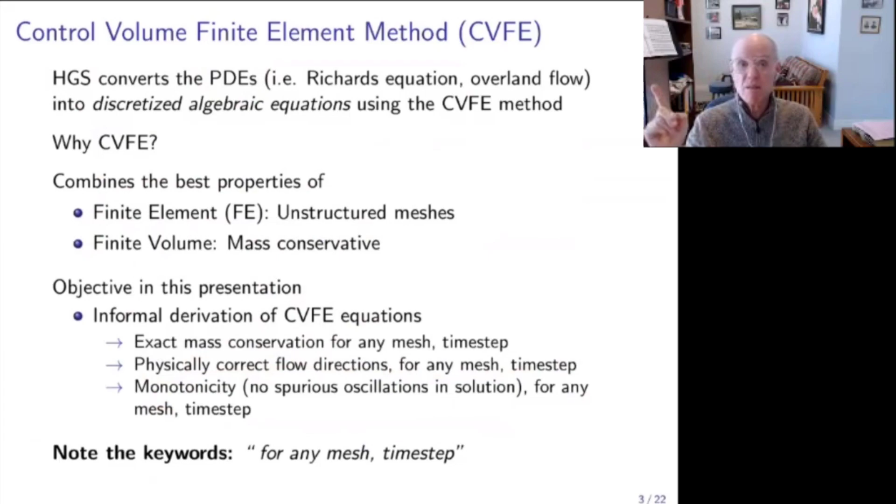And again, I'll point out I've used this same keyword several times here, for any mesh in any time step, not just in some theoretical limit of vanishingly small mesh size and time step. So first of all, we'll think of looking at our equations in terms of a discrete mesh. So we define a mesh, and we'll look at a generic node I, and it will have a bunch of neighbors. And I'll be using node J as a sort of generic neighbor of node I, a mesh neighbor.

We will make no assumptions about the mesh, the type of mesh used. It could be linear basis functions on triangles, or prisms in 3D, or tetrahedra. And we don't really have any assumptions about dimensionality, 1, 2, or 3D, or the order of the basis functions we use. And the same idea is used for subsurface equations, surface equations, fractures, double porosity, and so on. This is a very generic technique that can be used with wide applicability.

So as a prototype, to give you an example of how we discretize the equations, let's look at Richards' equations, where I'm sure you're all familiar with Richards' equations. So the left-hand side here, I have what I call the accumulation term, which is really just the time derivative of the mass accumulation at a particular point in space. And define some of these terms in the equation here. Theta here is, of course, the porosity. And S sub W is the water saturation.

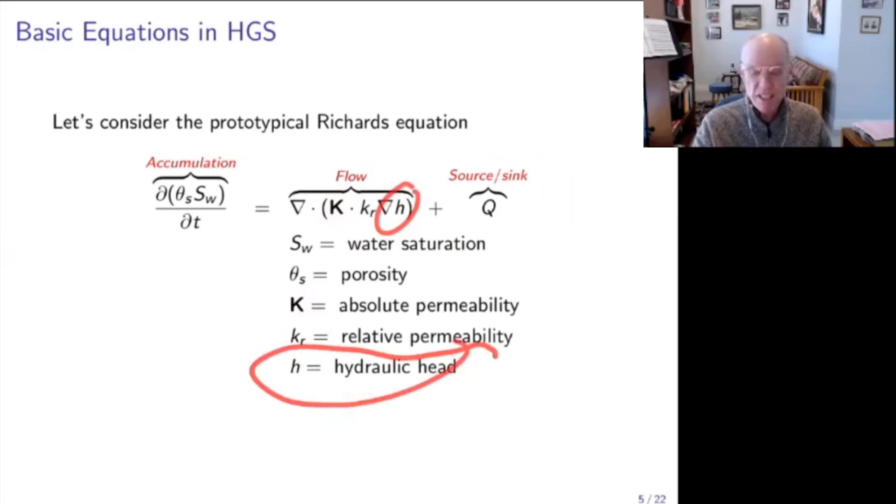And the right-hand side here, I have what I call the flow term. And the flow term has the absolute permeability in there. It has the relative permeability, K sub R. And it has the hydraulic head. And of course, on the right-hand side, what you get is the gradient of the hydraulic head. And finally, we have some source sink terms. Okay, so accumulation, flow, and source sink.

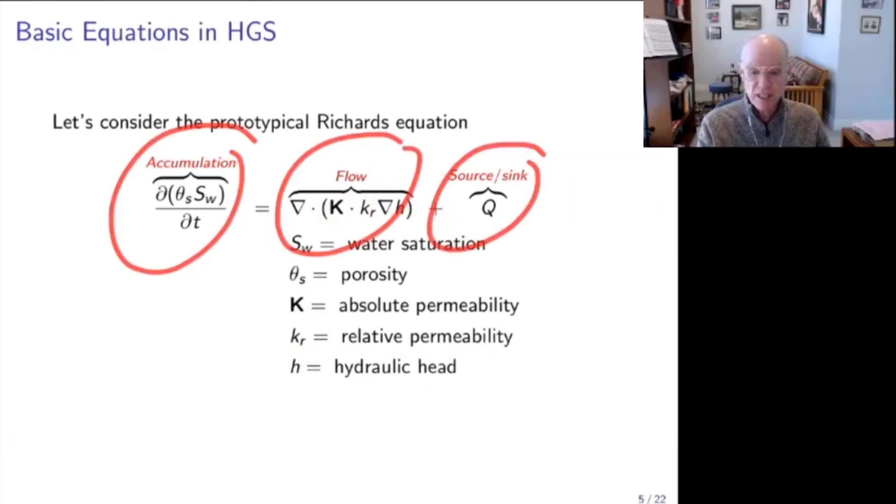Now, I'll remind you of the properties of finite element basis functions. These are just interpolants, if you like. So given a mesh, which is a bunch of discrete nodal values, at each node, we define what we call finite element basis functions. And these basis functions or interpolants have the following properties. So N sub I, the basis function associated with node I, is 1 at node I and 0 at all other nodes. And the sum over all the nodes of the basis functions equals 1 everywhere.

And on the right-hand side of the slide here, I've got the examples of one-dimensional basis functions, linear basis functions, also called hat functions. And you can see in that case that basically, xi is node I, say, so Ni is the basis function associated with that node. It has a property that it's equal to 1 at node I and 0 at all other nodes.

And so, for example, if hj is the approximate value of the head at node j, then if I look at this expression here, I can approximate h, the hydraulic head, everywhere by just multiplying the nodal value times the basis function and summing that, and that will be our approximate value of the hydraulic head, which is true everywhere in the domain. It's just a linear interpolant over these basis functions.

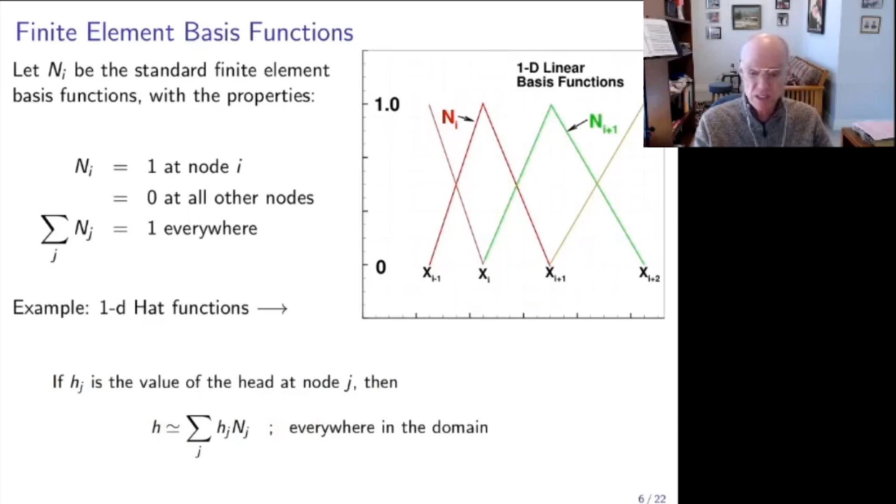Now, how do we approximate the solution using these basis function interpolants? Well, let's let hjn be the approximate value of the head at node j, time step tn, or n delta t. And again, we're going to approximate the hydraulic head, porosity times saturation, which is essentially the mass, and the source sink term at time step n, which is n delta t, by the following. So h, we'll approximate it by the sum over all the basis functions of the nodal value at time n, node j, times the appropriate basis function.

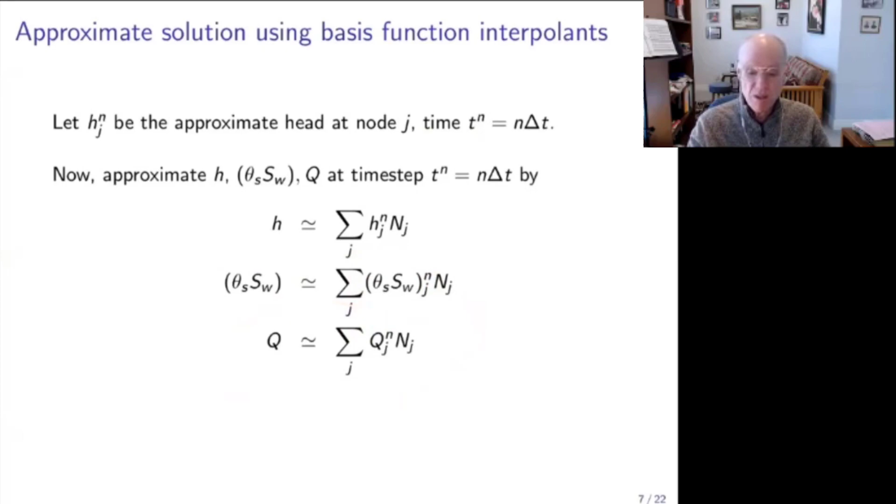And similarly with porosity times saturation, so the porosity times the saturation at node j times the basis function, sum over all the nodes. That will then give us the approximate value of this expression everywhere in the domain. And similarly, the source sink term, same idea, multiply the nodal value of the source sink term times the basis function and sum over all the nodes.

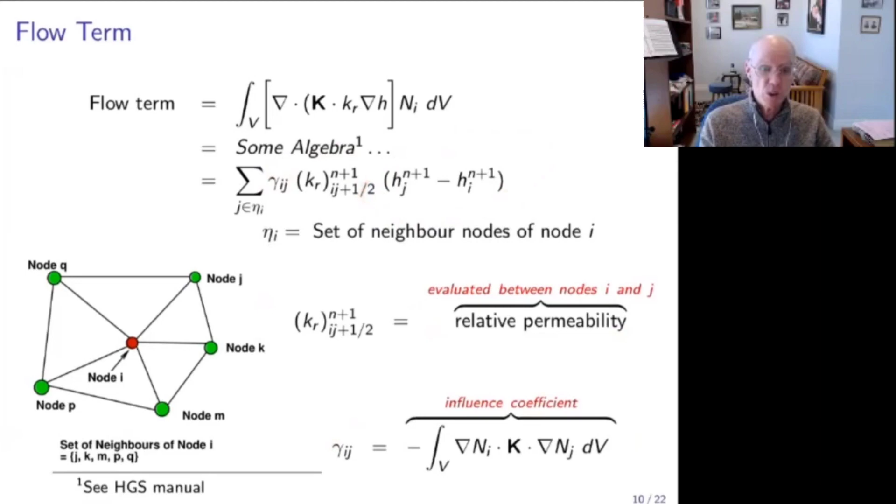And finally, this gamma IJ term here is what's called the influence coefficient. And that's given by this expression here, which is somewhat abstract looking, but it's easy to interpret physically. And finally, of course, I have the head difference between node J and node I. So the final equation at node I ends up being very simple. So recall again that the mass at time n+1 is just given by porosity times saturation times the volume associated with that node. So the final discretized CVFE equations at node I are simply a mass balance.

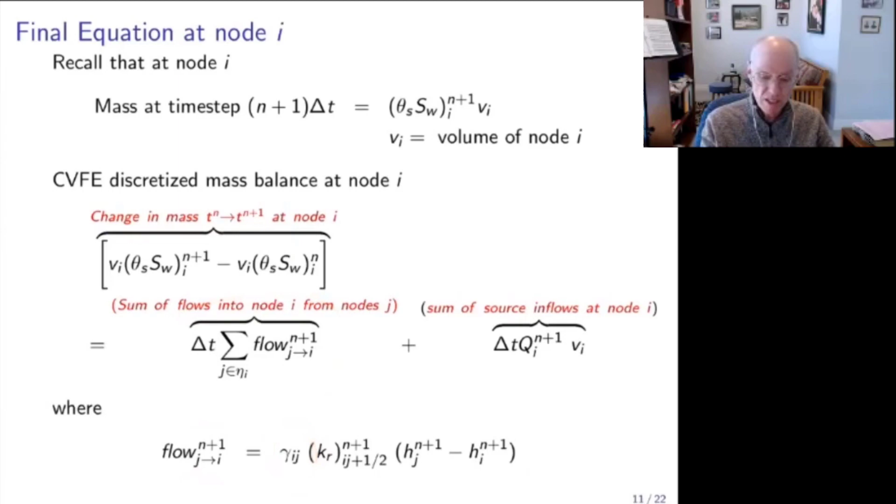So the left-hand side is just the mass at time n+1 minus the mass at time n. Right-hand side, I have the sum of flows into node I from node J, and the sum of the source and sink inflows at node I, whatever they may be. Where this flow term here is just given by the expression from the last slide. So flow from J to I is gamma IJ, the influence coefficient, times the relative permeability term times the head difference.

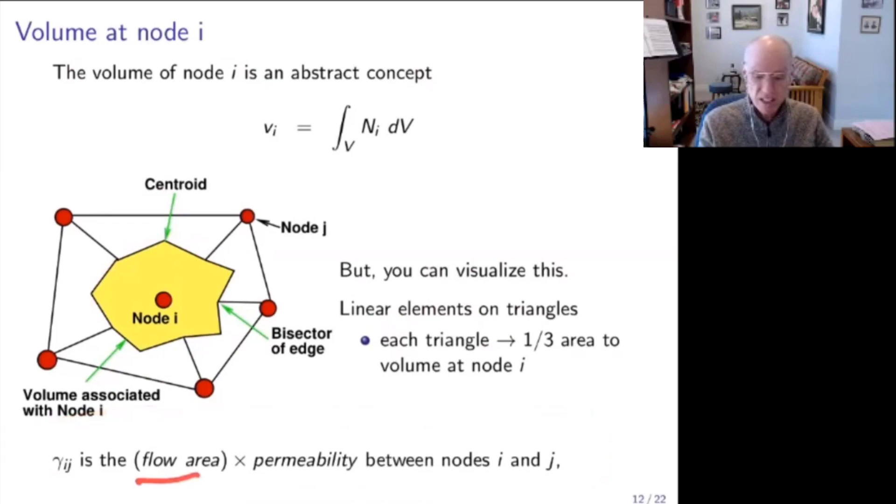Now the volume at node I, that's kind of an abstract concept. The volume is just simply the integral of the basis function over the whole domain, but you can visualize this. So for linear elements on triangles, each triangle contributes 1/3 of its area to the volume at node I. So here's effectively a visualization of the volume associated with node I. Each triangle which neighbors that node contributes 1/3 of its area to that node. And if you want to have a picture in your mind of what that influence coefficient is, it's essentially the flow area times the absolute permeability between node I and node J.

Now, what about mass conservation? I claim that the CVFE method is mass conservative. And this is what we mean by that. I'll just state that like a theorem. If the discrete equations are solved exactly, then the CVFE method, or discretization, has exact mass balance for any time step and any mesh size.

Well, the proof is actually trivial. It's got 2 lines. I'm going to sum the CVFE equations over all nodes. So I'll take every discrete equation and I will sum it over all the nodes. So the left-hand side is going to be the total mass at time n plus 1. The right-hand side, I'm going to have a term which is the total mass at time n. This will be the total source inflows over that time step on the right-hand side.

And finally, here's the flow term here. Now, I cleverly wrote this flow term using the fact that if I just sum for j bigger than i, then if I include the flow term from j to i and i to j, that will be the total flow over all the flow terms on the right-hand side. And I did that because then it's obvious. Flow from j to i is going to be equal to the negative of the flow from i to j. So this whole term here will just be 0.

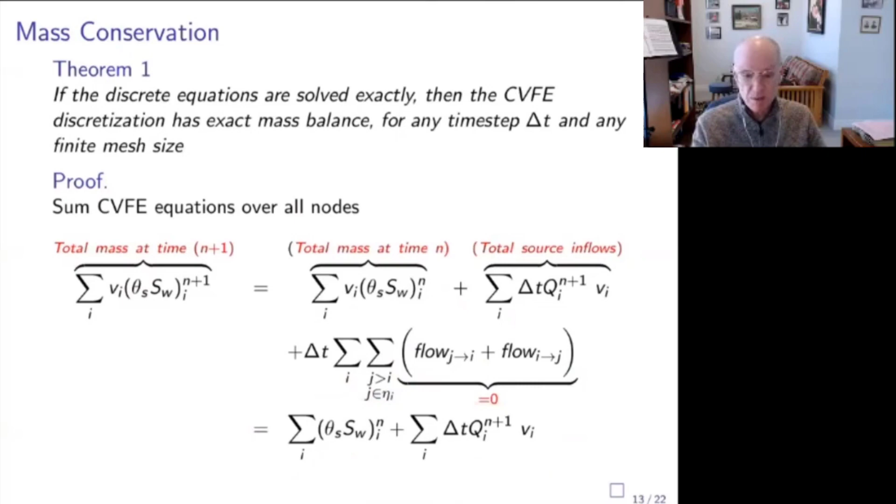So the right-hand side then is just this expression here, which is total mass at time n plus source inflows over that time step. Now, in other words, the total mass at time n plus 1 equals the total mass at time n plus the sum of source and sink terms.

Now, note that any convergent discretization conserves mass as the mesh and time step go to 0. A mass conservative discretization conserves mass for any mesh size and any time step size, not just in the theoretical limit as the mesh and time step go to 0. In practice, we're always using finite mesh sizes. So we're interested in what happens in the finite mesh size, not just in this theoretical limit.

If this is not true, you get rather absurd things happening. Dense fluids float on top of less dense fluids in a discrete sense, which is obviously not physically observed. So I'll emphasize again, this positive coefficient gives us physically correct flow directions. So for example, if the head at some node is Hi, then if the head at node j, Hj, is bigger than Hi, the fluid will flow from j to i in the obviously correct physical flow direction. And similarly, if Hi is bigger than Hk, fluid will flow from i to k.

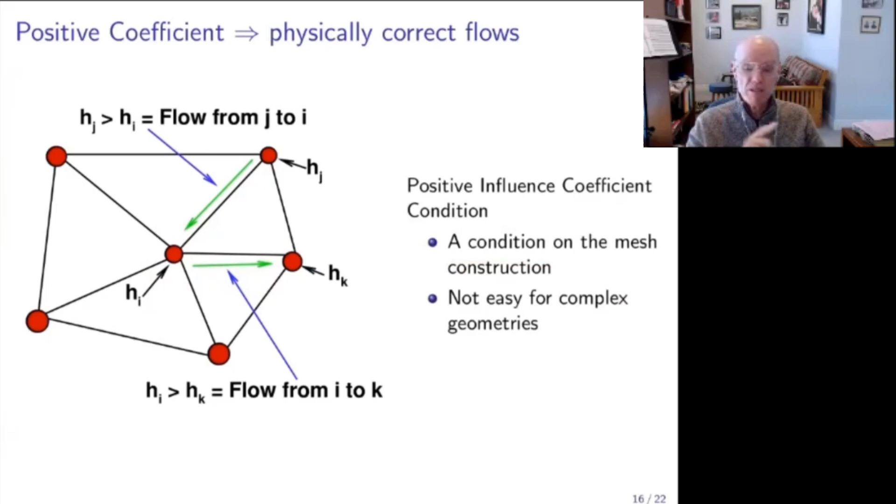So if a CVFE method is used with fully implicit time stepping, positive influence coefficients, and upstream weighting, then the scheme is monotone. And what does monotonicity mean from the point of view of mathematics? It simply means that if I take the partial derivative of H_i^(n+1) with respect to H_j, this is greater than or equal to 0. So what does that mean? Or why is it important?

Well, you can kind of get an intuitive idea why that's a useful property, because if that's true, and if I look at my generic node here, node i, if I perturb the value of the head at the neighbor node j, then this will result in a positive change in the head at node i. This physically makes sense, right? Increase this value here, then this value should increase. And the bottom line from this property is that this guarantees that non-physical oscillations cannot occur in the numerical solution. And of course, you also have the property that mass cannot go negative, which is obviously something you require.

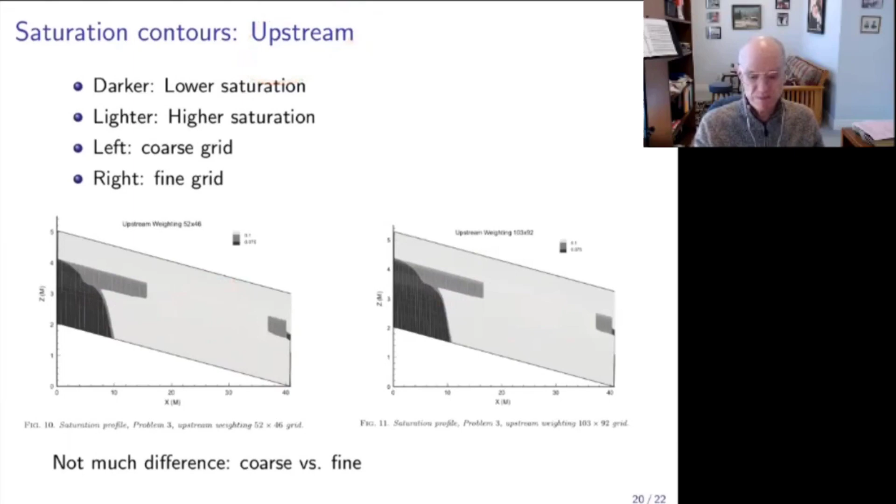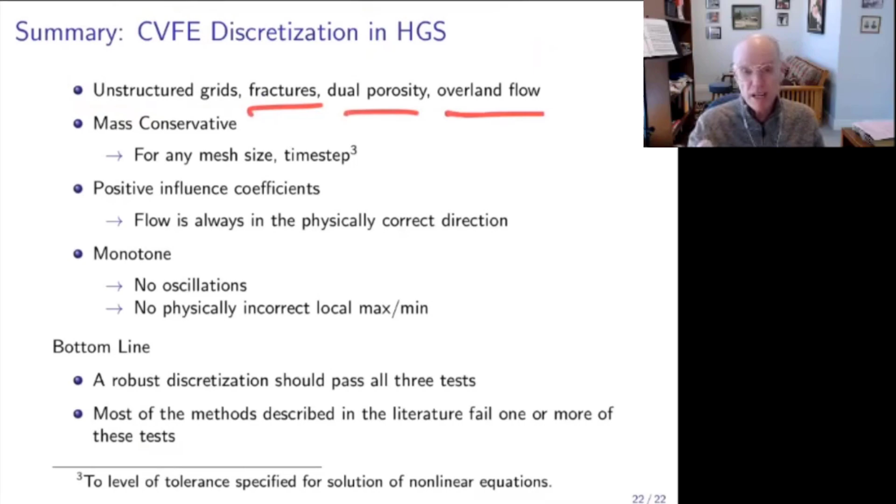Okay, so let's summarize then our final results here about this CVFE, control volume finite element method, which we use in HydroGeoSphere. So basically, we use unstructured grids, and in that way, it's much easier for us to handle things like fractures, dual porosity, overland flow features with streams and lakes. Our discretization is mass conservative.

So for any mesh size and any time step, again, this is any mesh size, any time step, not in some theoretical vanishing limit of mesh size and time step, the discretization is mass conservative. We ensure positive influence coefficients when we construct a mesh. This means that the flow is always in the physically correct direction.

And it's monotone. Use of upstream weighting gives us a monotone discretization. What that means is that there's no physically incorrect oscillations. There's no physically incorrect local max and min. So the bottom line here is that a robust discretization should pass all these three tests: mass conservative, positive influence coefficients, and monotone, to give you a robust technique, right? We want a robust technique.

Unfortunately, you'll see a lot of methods in the literature fail one or more of these tests. So if somebody comes to you with a new discretization method, you would ask, okay, is it mass conservative? Does it have positive influence coefficients? Is it monotone? If it is, okay, that's a candidate method to be used. If not, we think this CVFE method is a good technique to use because it's very robust, very reliable, and gives you good results no matter how nasty a problem you've got.

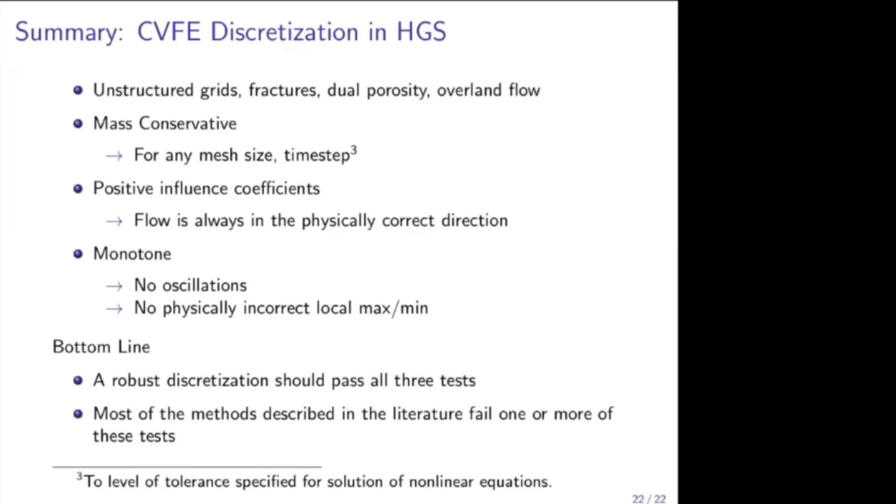My talk today is about more practical aspects of the CVFE method and parallel processing. As Peter mentioned in the previous talk, the CVFE method is robust and reliable. If someone asks me if every simulation result will be good with the CVFE method, my answer will be absolutely no, because the CVFE method is a good tool like a nice car, but it depends highly on who is driving the car. So my talk mainly focuses on why mesh generation or construction is important, and how to use or drive the CVFE method to achieve better solutions.

Additionally, I'm going to talk a little bit about the parallelization techniques implemented in HydroGeoSphere. Now, a brief overview of my talk is that first I will talk about mesh construction for CVFE and then parallelization. Specifically for the first part, main numerical schemes implemented in HydroGeoSphere, and then a little bit about mesh construction for best practice by checking your mesh quality. And then for the second part, I will also introduce some parallel schemes applied to HydroGeoSphere, which we specifically developed for improving computing efficiency.

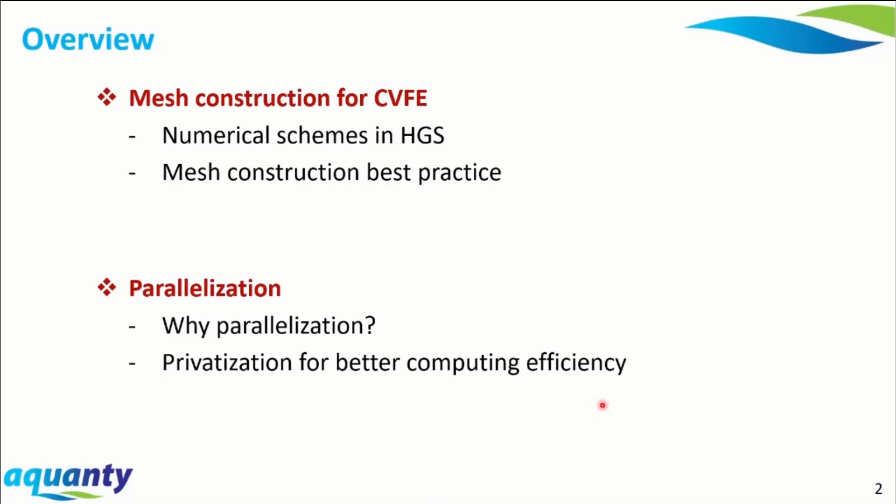Here is an example of meshes for 2D surface and 3D subsurface flow and solute transport simulations. This numerical model consists of 15 layers with 220,000 nodes per layer, and that comes to 3.5 million nodes in total. This model is constructed with triangular elements for the 2D surface model and prism or pentahedron elements for the 3D subsurface model.

You can build a 3D model with one of these three types: tetrahedrons consisting of 4 nodes, hexahedrons with 8 nodes, and pentahedrons with 6 nodes. But a numerical model with mixed mesh shapes is not currently applicable to HGS.

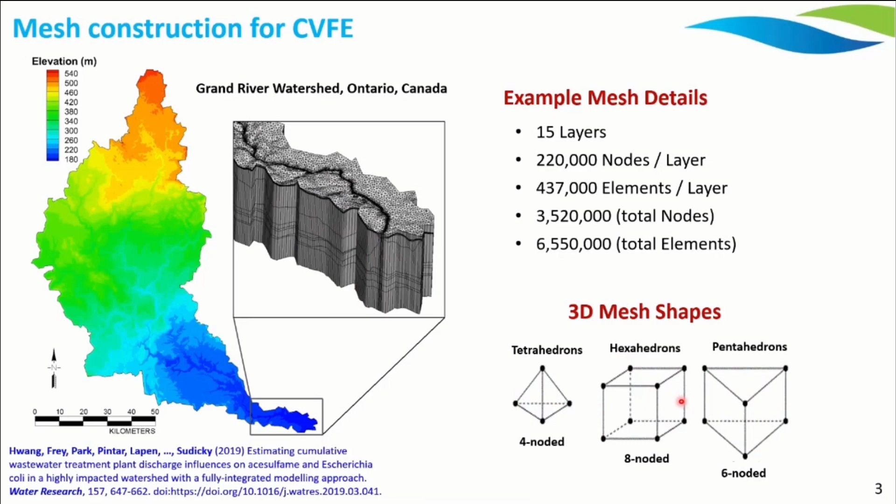Okay, let's look at numerical schemes implemented in HydroGeoSphere. Here, this figure shows the difference between physical and numerical domains. Physical domain represents the real system, and the numerical domain represents the simulation domain.

In the finite element approach, as Peter mentioned before, the finite element method uses basis function interpolants to approximate solution in numerical domain. Problem is the basis functions are based on the orthogonal coordinate system, which is the same as the physical system. For numerical domains, if a mesh is a hexahedron with right angles, it is easy to calculate basis function interpolants because every angle in this element is orthogonal.

However, in many cases, we use unstructured meshes like this to represent more realistic conditions. In this case, this numerical domain is required to be transformed using this Jacobian, which is extremely time-consuming for calculation. So we use the integrated finite difference approach, which is relatively simple and cost-effective.

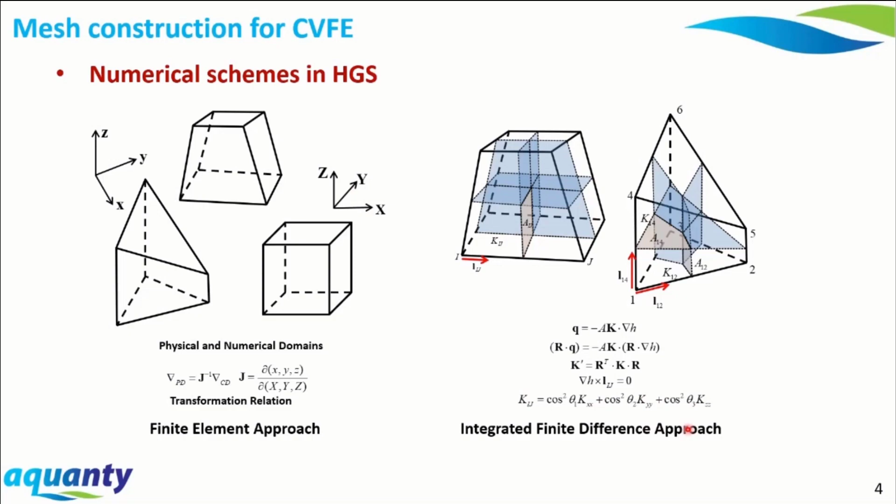Let's look at the importance of mesh construction. For calculating the influence coefficient along each segment in this triangular element, originally we used the circumcenter approach to calculate the influence coefficient for each neighboring node. In many cases, it works fine if the circumcenter is located inside of this triangular element.

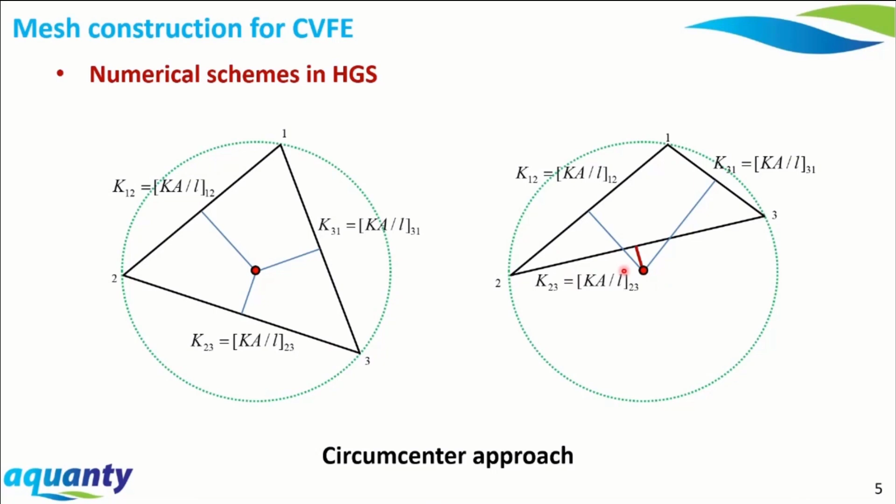However, if the triangular element is something like this, where one of the 3 inner angles is greater than 90 degrees, then you can see the circumcenter of this element is located outside of this element. The problem is the influence coefficient or flow area for nodes 2 and 3 is negative, which causes oscillatory behavior because the internodal flow between 2 and 3 is from lower to higher heads. So we can solve this problem by assigning 0 for negative influence coefficients.

Unfortunately, we have additional problems. Here are problems related to negative influence coefficients. For surface flow simulation with zeroing negative coefficients, here we are looking at the spatial distribution of surface water depth, with blue representing shallow water and red representing deep surface water depth. As you can see in the downstream of this domain, there is a water build-up in this area even though there is no dam assigned in this simulation.

So because of this zero influence coefficient, surface water cannot flow at this point and generates a huge water reservoir in this area. Let's look at the problem of the circumcenter approach. Here at the same location, there is also a huge reservoir because of orthogonal triangle elements that cause a zero influence coefficient. In this case, the influence coefficient is also zero because the circumcenter is located on this line.

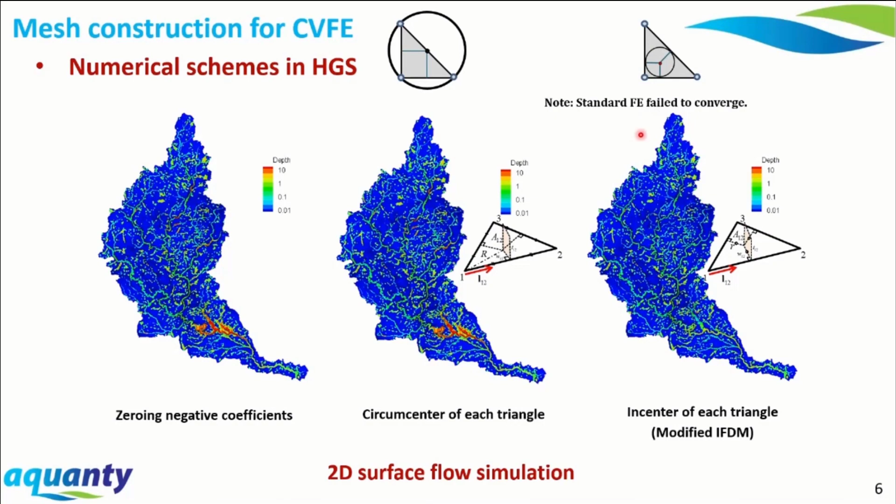Even though we have various numerical schemes, one thing we should keep in mind is that a high quality mesh is the first priority for achieving reasonable solutions. A high quality mesh can reduce numerical oscillations and improves computing efficiency. How to obtain a good mesh is actually another research field, which is also related to graph theory. We don't need to get into this. Instead, we can use a good mesh generator that can produce good meshes.

Here, AlgoMesh developed by HydroAlgorithmics is one example. Additionally, we can also check the quality of generated meshes with two things, element size and element aspect ratio. For element size evaluation, we can simply check minimum and maximum element sizes based on the element size distribution of the model. And next is element aspect ratio, which is the ratio of maximum to minimum edge length of each element.

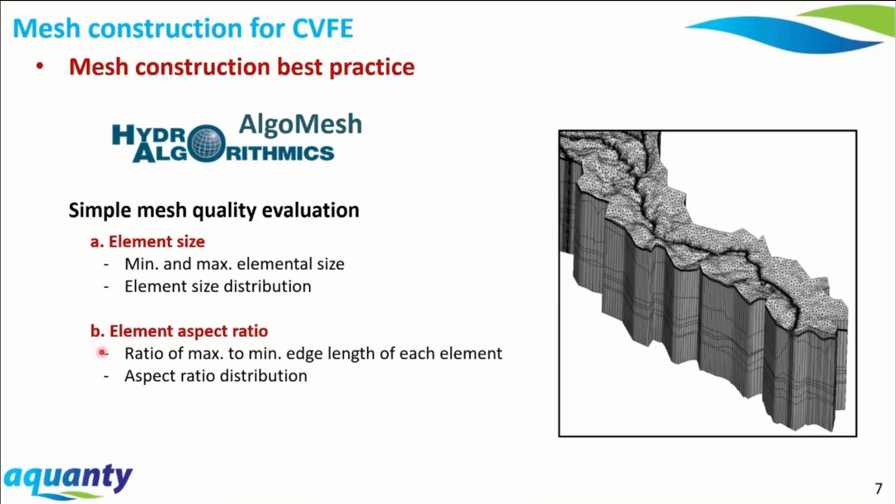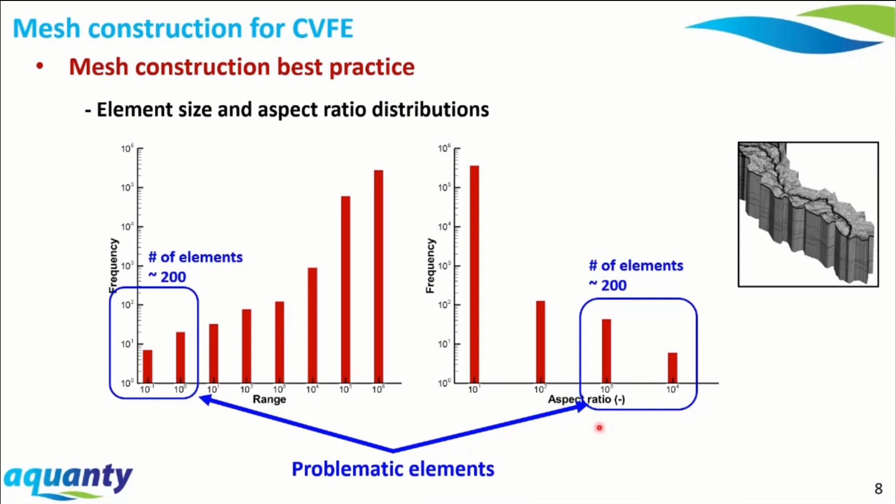Okay, let's look at an example of simple mesh quality evaluation. Here we are looking at the mesh size distribution and aspect ratio distribution based on this 2D surface model only. In the element size distribution, the element size of the model ranges from 0.1 to 1 million square meters. For the element aspect ratio distribution, the aspect ratio ranges from 10 to 10,000. Here we need to have a close look at relatively small elements and also relatively high aspect ratios.

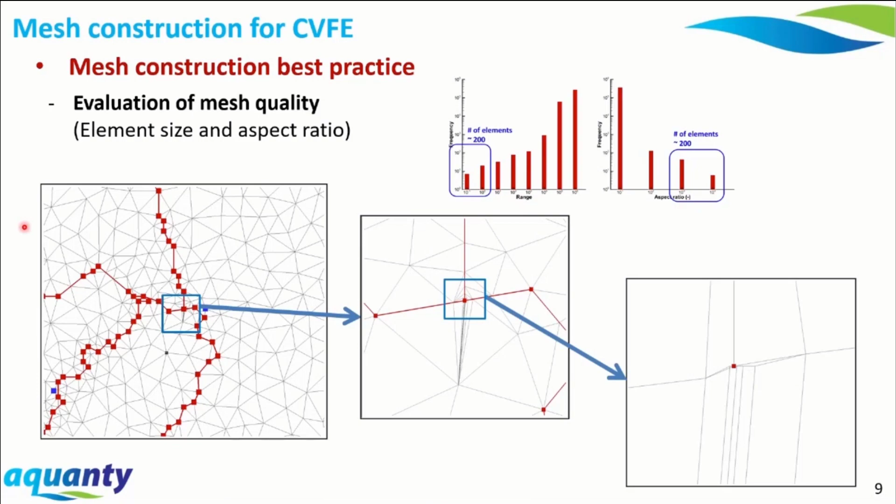Using the AlgoMesh optimization process, we can obtain good quality meshes. Here, these figures show the optimization process performed by AlgoMesh. In the first step, there are many coarse meshes, and you may notice that there are two meshes that are elongated nearby the constraints. In the second and third optimization steps, bad meshes have now disappeared by the mesh refinement process.

In the final stage, there is no further optimization, and the meshes are almost similar to those in the previous step. So if we look at the element size and aspect ratio distributions, we can find that there is no small element size less than 1 square meter, and the aspect ratio of the meshes ranges from 1 to 4.

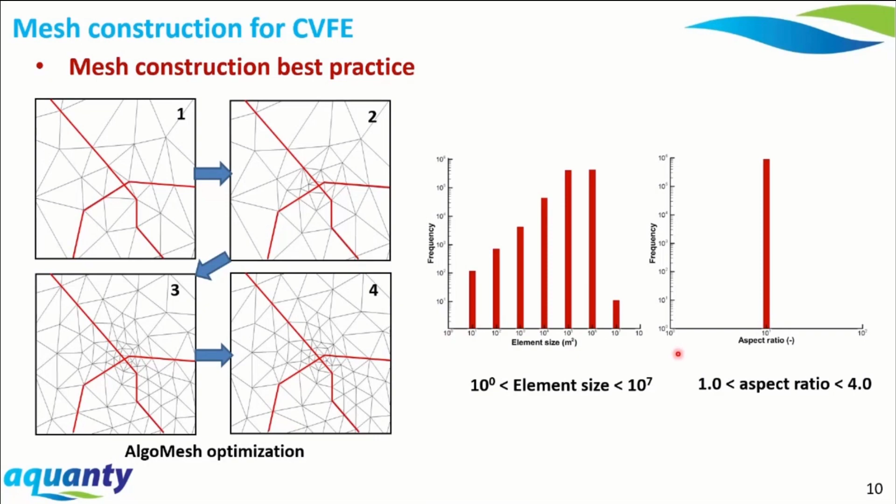Now move to parallelization implemented in HydroGeoSphere. Here these figures show the difference between serial and parallel computing. Serial computing uses only one core or CPU for processing data, while parallel computing uses multi-cores for processing data simultaneously. So the basic idea of parallel computing is to save computing time by breaking up a task into smaller pieces and executing those pieces at the same time with multi-cores.

Then let's look at parallel computing in HydroGeoSphere. We use the OpenMP library for shared memory systems, which is like your desktop. Here, this figure shows the computing flow of HGS, which mainly consists of three parts: initializing program, solving matrix, finalizing program. For the solving matrix part, there are two types of matrix solvers, linear and nonlinear solvers.

And each of the solvers has three main parts: matrix assembly, matrix preconditioning, matrix solver. And parallel algorithms have been implemented into the matrix assembly and matrix solver parts because they are the main bottleneck during integrated surface and subsurface simulations.

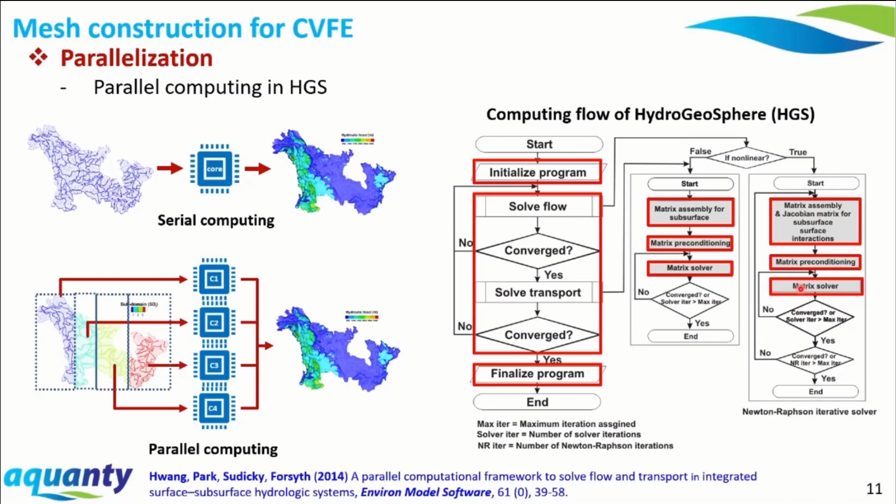Okay, we can look into the parallel scheme applied to matrix assembly. This figure shows a general matrix structure for serial computing. If we apply parallel algorithms directly to this matrix, there will be something like this. It may work in some cases, but there will be a data racing condition, which occurs when multiple cores access a shared memory location simultaneously.

Here you can see the overlapped areas, in which each core requires information provided by other cores. For example, core 2 in this case needs to wait for information until core 1 provides this information. So the computing efficiency will not be much improved because of this waiting time.

So we need to split the simulation domain into the number of cores used for parallel computing, as you can see in this figure. Here the matrix has been restructured for 2, 4, and 8 core computing using the domain decomposition method or domain node reordering method.

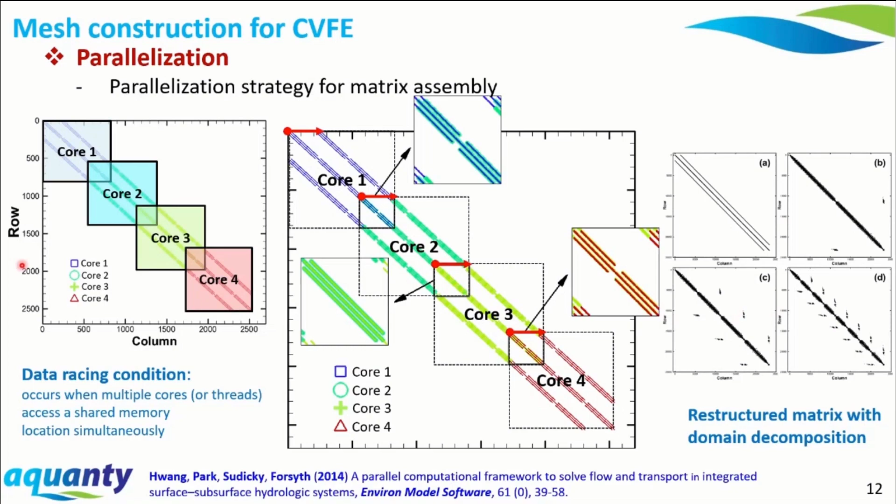And then we can move on to the matrix solver parallelization. For improving the computing efficiency, we have developed parallel computing algorithms that are especially efficient for handling large data sets. This algorithm is called the matrix chopping and privatization scheme. For a large-scale model, its matrix requires huge memory access, which takes much time to get information from the shared memory system.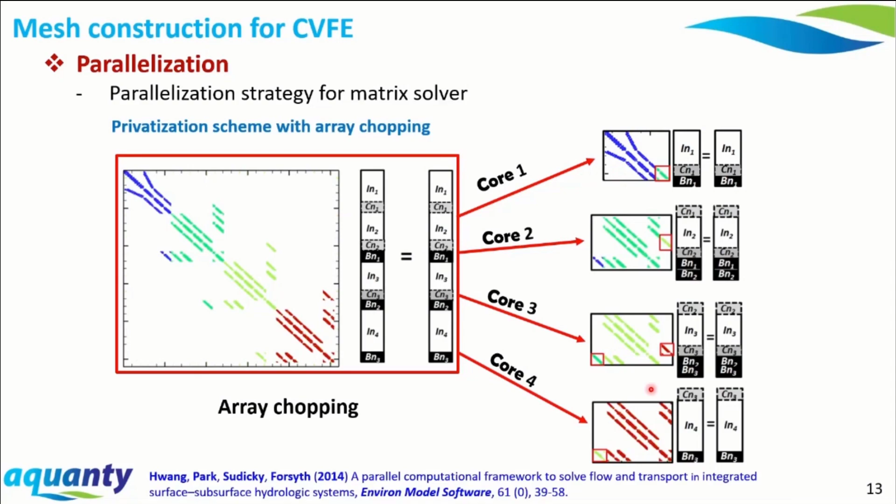So we can reduce memory access time by chopping the matrix and arrays. Additionally, we found it can be more efficient if the chopped matrix is stored for each core, which is a privatization scheme. So finally, using the array chopping and privatization scheme, each core can solve this size of matrix without accessing the main matrix.

Okay, here is the summary of my talk. First, HydroGeoSphere uses advanced numerical schemes that can provide physically correct solutions. For better mesh quality, users need to check element sizes and aspect ratios before running simulations. Additionally, robust mesh generators such as AlgoMesh are recommended. Second, HydroGeoSphere uses efficient parallel algorithms such as matrix chopping and privatization schemes for improving computing efficiency.

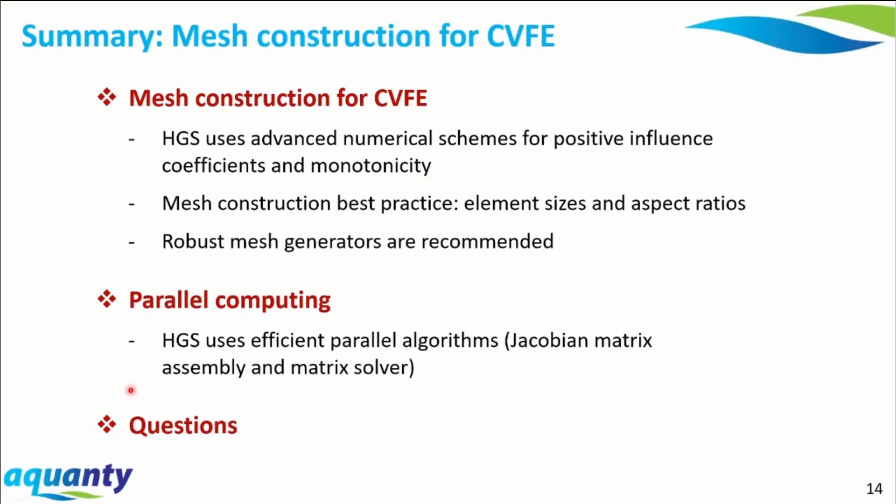This brings us to the end of our webinar on the numerical solution techniques and parallel processing framework that power HydroGeoSphere. Please see the video description for further resources and reading material on these topics.